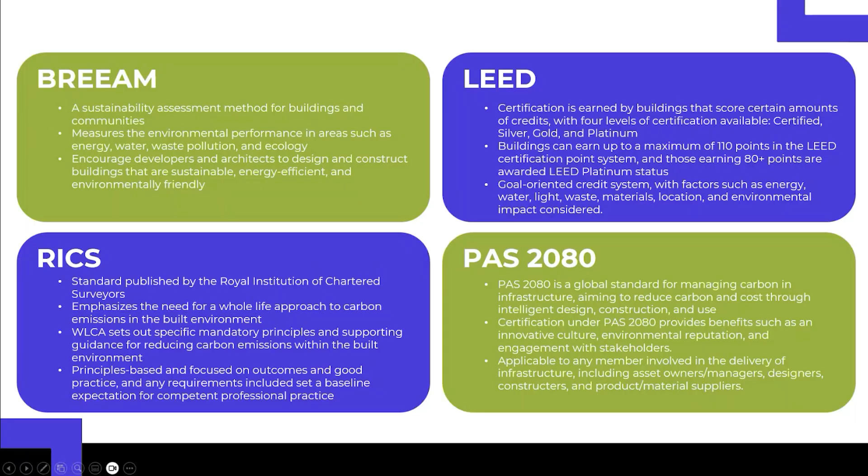PAS 2080 at the bottom is a globally applicable standard. This focuses on managing and reducing carbon emissions throughout the entire life cycle. We've got BREEAM, we've got LEED, we've got RICS, and we've got PAS 2080. And that's why we'll come on to this section now, all about the RIBA stage of works.

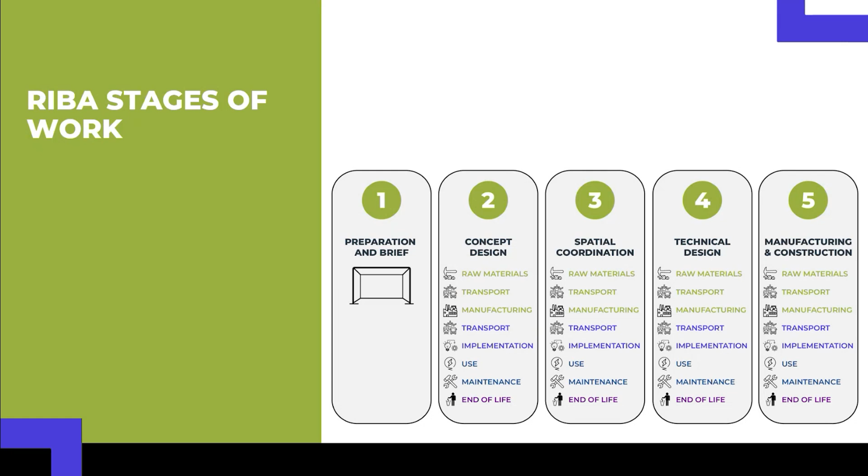In this section, we'll delve into this and we'll start to think about the concept of a whole life cycle carbon assessment. These are absolutely essential for doing the calculations to achieve the four standards which we talked about before. These are like a plan of works that outlines the stages of a construction project. We go from the inception, the idea, the preparation of a brief when you're in a boardroom actually first discussing it, all the way through to it being completed.

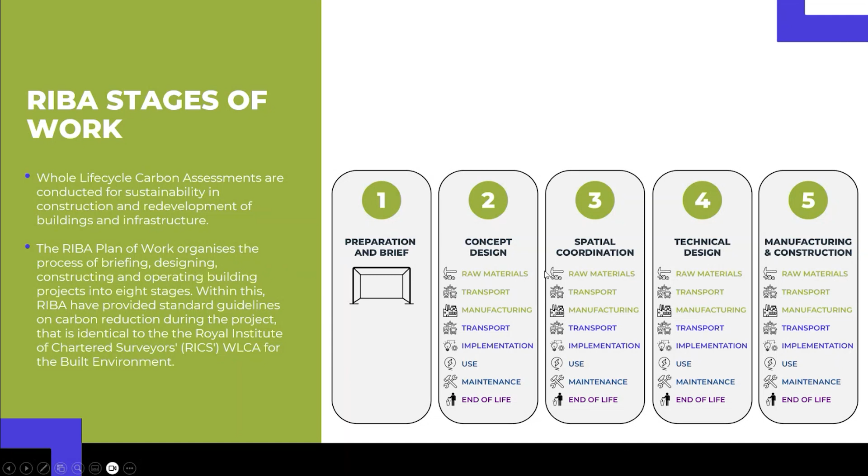So it's divided into 8 main stages. Here we show the 5 main stages that are needed for any sort of calculations which are included in the RICS WLCA. And why might you want to go for these? Well, obviously for the benefits. So we want to really understand how carbon accreditations help construction and infrastructure. Essentially, they help you become committed towards a sustainable development and environmental future.

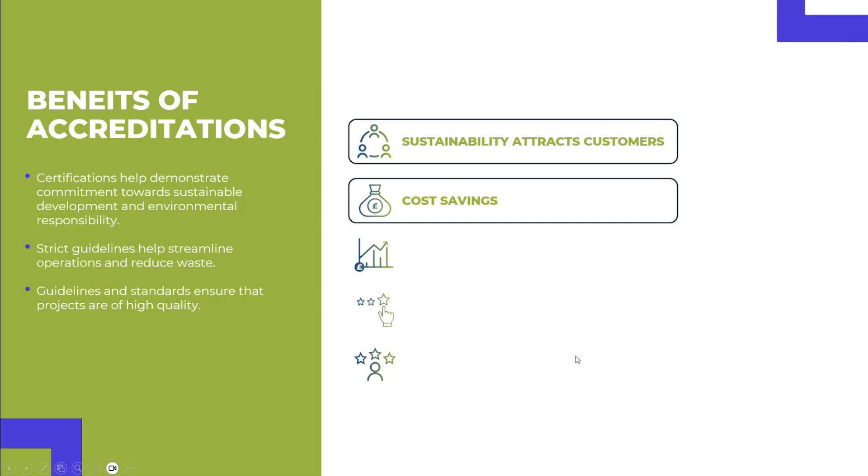So first of all, sustainability, it attracts customers. It also has cost savings. They can optimize processes, they can improve resource efficiency, and the benefits are not just environmental because they increase these efficiencies. They also improve customer satisfaction, and overall, the accreditations ensure high quality projects.

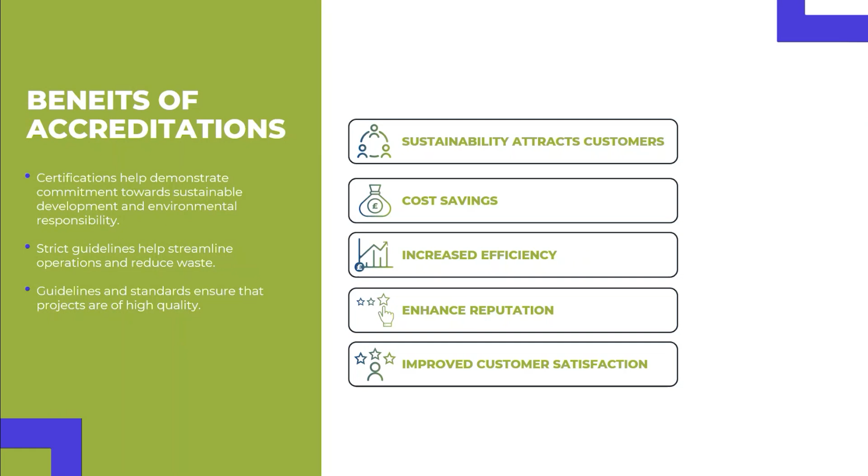Whereas if you get to the end, the construction, the operation, the maintenance, we've already started building the building, we've already started putting in everything that we need. Any changes then will cost too much. The structure of a building has already gone up.

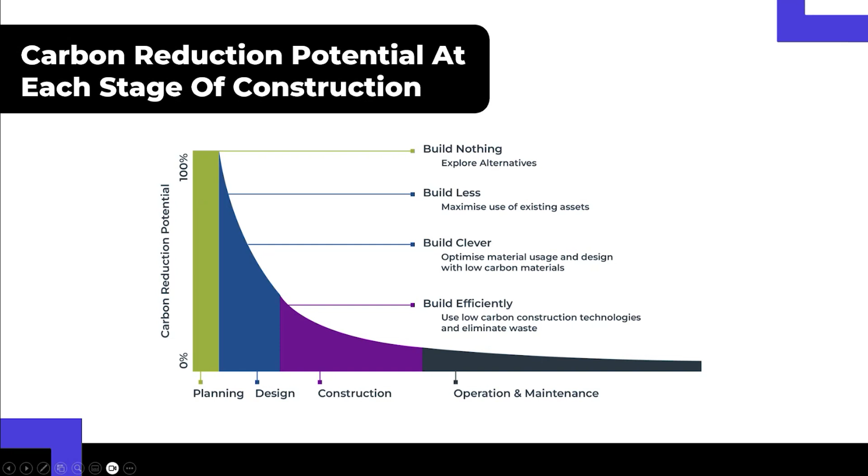We can't change it. So the earlier that we set a carbon management plan, the earlier we start to think about it, the more potential we've got to reduce emissions. The planning stage is absolutely crucial. It sets a foundation. So how do we do this? We do this with something called a whole life cycle carbon assessment. It helps us evaluate and manage the total carbon emissions associated with a construction project throughout its entire life cycle.

So it's from A1 to A3, all the way through to the end of life. Material extraction, all the way through. We've got to make sure that we define the scope, so then we know exactly what's included in the project. So identify the boundaries. Is it just that one building? Is it two buildings? And then what is important to us? What stages are important? Ideally, it'd be all the stages.

And then we can start to collect the data and measure the carbon footprint. So you use the collected data and you calculate the carbon emissions. This involves very well established carbon calculations, exactly like what's in a standard business carbon assessment. So you take the data, you make sure it's in the right units, you multiply it by the emission factors, and then you sum everything up and get the tons of CO2. Once you've done the calculations, you can identify reduction opportunities and then implement the strategies.

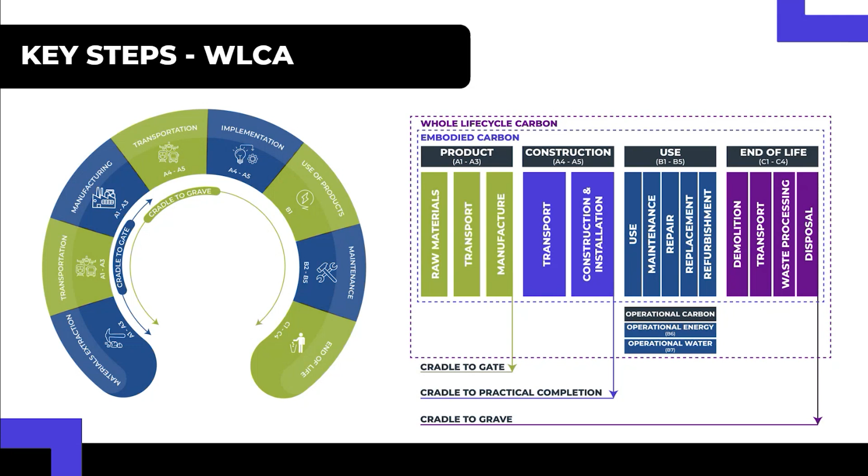So what might the results look like? Might look a little something like this. So we've got each stage here. We've got the embodied carbon stage, A1 to A3. This is the raw materials, the transportation, the manufacturing. And if we look at two different types of heating, we've got a natural gas boiler and electric heating. At this embodied carbon stage, we're looking at the materials that go into each of them.

So what goes into a natural gas boiler, the materials, you're talking about the casing. And then we start to look at where these raw materials come from. How are they mined? What emissions are produced from mining? The transportation of them to be manufactured. So the boiler has to be manufactured. It's the manufacturing, the mining of the raw materials, transportation to the boiler manufacturing site, and actually making the boiler.

And we've got this A1 to A3, and then we've got the transportation to site, A4. So this is like transporting the boiler, it's all made, the electric heater, it's all there, transporting it to somebody's house or to a construction site. A5 is the construction stage. So how are the boilers, the heaters, how are they installed?

Whereas when it comes to maintenance and repair, according to these results, the natural gas boiler requires a lot more maintenance and repair during the use phase, the B stage, B2 and B3. It uses a lot more. It also needs replacing, the natural gas boiler, whereas the electric heating does not. And towards the end, you add up all the results and you get a total carbon footprint. And then we've considered everything from A1 all the way through to C4.

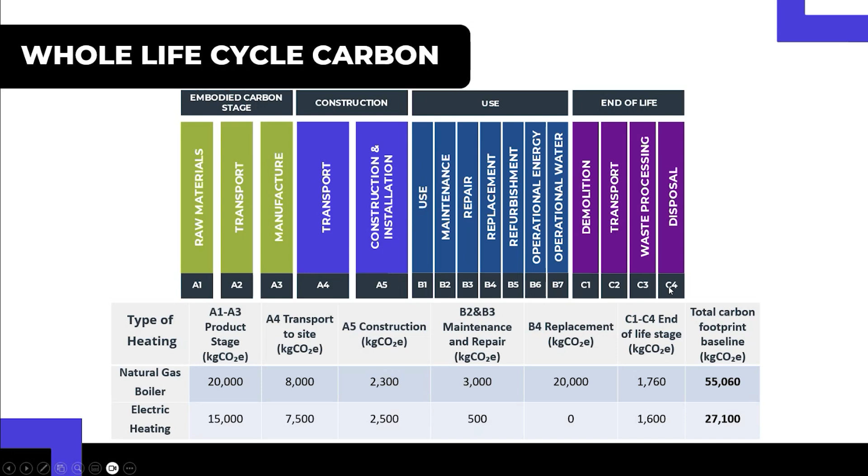So, successful implementation. What does that look like and what are the benefits of it? In the end, you get accurate carbon footprint results. Right, the final stage is to actually look at some real life examples. I'm not sure if anybody recognises this building, but this is in Manchester. It is One Angel Square. This one, for the Co-operative Group, was certified BREEAM Outstanding and LEED Platinum. Again, absolutely exceptional sustainability credentials.

But what I liked about this one is that it also did PAS 2080. One Angel Square focused on this whole life cycle carbon approach. It considered design all the way through to the end of life, doing each scope, each stage. It helped the project achieve specific targets, like it wanted to minimise embodied carbon by so much. It had a rigorous design analysis, and it also managed to reduce a lot of waste.

So the benefits of actually implementing PAS 2080 were huge. It collaborated across the whole entire value chain, reducing carbon emissions, and also aligning to the UK government sustainability goals. So again, this building itself is a model for sustainable construction. It is one to be proud of.

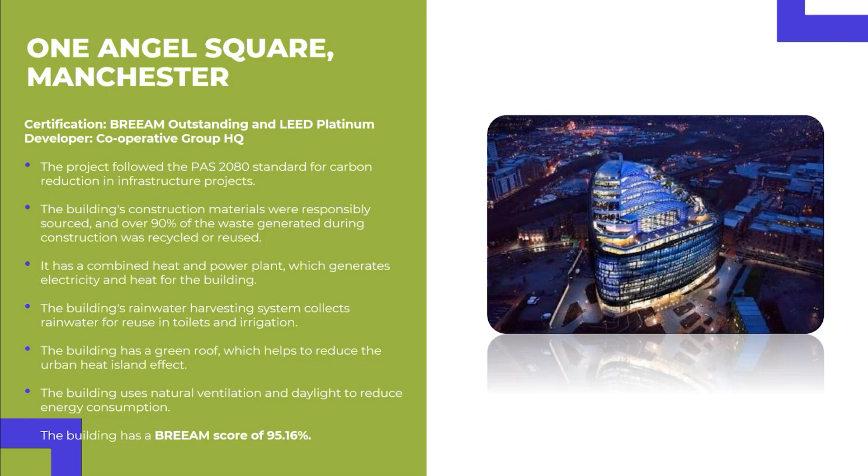It's got its own combined heat and power plant within the building, so it generates its own electricity as well as its own heat. So essentially, the building contributes to its own sort of sustainability. It's got a rainwater harvesting system, collecting rainwater, using it in toilets, irrigation. It's got a green roof, uses natural ventilation and daylight. And again, it's another really exceptional building to showcase what can be done.

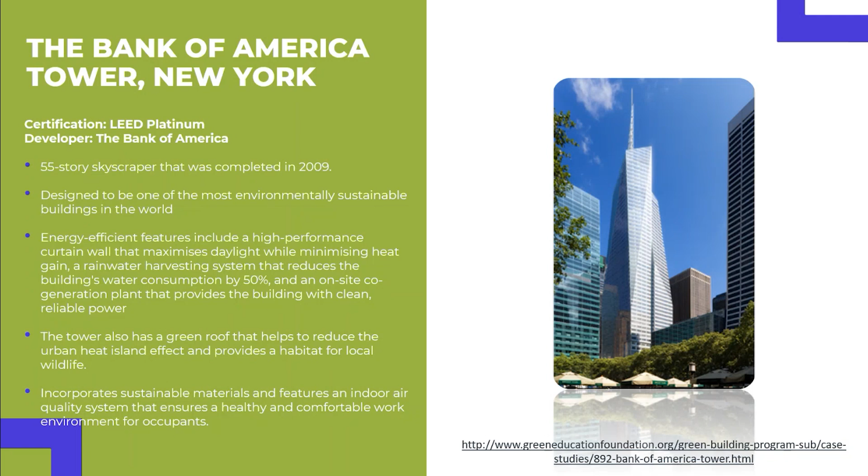We also have one in Japan. I thought this was an important example to show you, because not every building has to have LEED or BREEAM to actually be a prime example of sustainable design. This one in Akasaka in Japan is certified under CASBEE, the Comprehensive Assessment System for Built Environment Efficiency. And this one has the highest rating of S. So you can see that different accreditations have different ratings.

CASBEE is most popular in Japan. It's a comprehensive system and it evaluates the environmental performance of buildings and built environments exactly the same way as LEED and BREEAM. So it wants to enhance the quality while reducing lifecycle resources. And essentially, the Akasaka building incorporates several key design features, which include things like a green roof, energy efficient lighting, rainwater harvesting, natural ventilation, and it uses eco-friendly materials, lots of recycled materials, that sort of stuff.

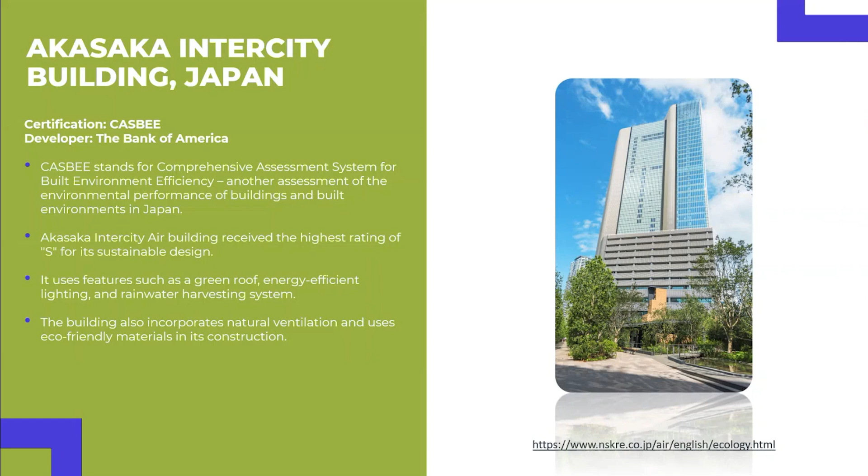In conclusion, we finally conclude with CPD. One of the main things to take home is that being an environmentally sustainable SME in the construction and infrastructure sector can be difficult. It really can, but it can also lead to a large number of benefits. Reducing the environmental impact can go hand in hand with improved cost efficiency. It just takes a lot more planning and implementing. But if you do it early, then it doesn't have to cost you a fortune to implement environmental technologies. You do them right from the start, you can find ways to reduce and become more sustainable.

The main thing is consideration. Look into it. So by implementing these sustainable practices, you can reduce your carbon footprint, which helps mitigate the effects of climate change and protect the environment for the future. Whole life carbon assessments are the absolute key. They're the tool to really measure the environmental impact, and they can help identify where to reduce emissions early in a project.

There are certifications such as BREEAM and LEED, with standards such as PAS 2080, which you can work towards to validate these sustainability credentials. So if you're already doing the work, you're already doing the calculations, or somebody else is doing the calculations for you for the project, then share it. Get the accreditations you deserve. And finally, the economic benefits.